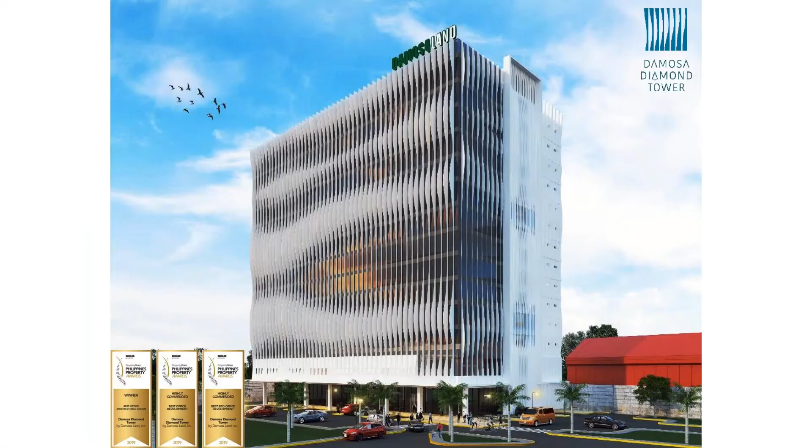Good morning, everybody, and thank you for joining us in a very significant week. We are very proud to present to you the Damosa Diamond Tower, which is a project that won Best Architecture Design for an office tower, as well as several commendations for office development and upcoming developments, not just here in Davao City, but also all over the Philippines with this significant contribution. Our company is PDP Architects, based here in Manila, and the project is in Davao City. As we move forward, we will see the next slide.

We would like to discuss with you the various highlights of it. It's located in a central business district already that is a mix of industrial, commercial, residential, bustling with views, interesting with its own tourism growth, a new seat of government perhaps for this administration, as well as convention centers, medical and emergency facilities. It is very close as well to the airport, hotels, and shopping districts. This is an artist's rendition of the project. Later on, we will be showing you actual photos of where we are in the stage of construction.

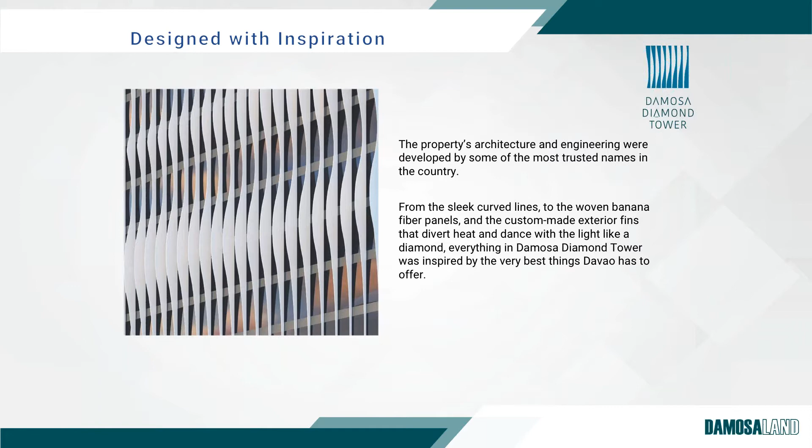So we have been commissioned to work on this project, and our inspiration takes form from the company's main agricultural business. Damosa is owned by a family that really began in the banana plantation business, and because of this, our inspiration was the banana fiber. That fiber, when you cut up the stalk in the middle, you will understand that the sinews of it and the grains are following a certain curvilinear form.

And we emphasize this in the building deck, as well as the facade, the fins, showing and highlighting those curves. So we feature a lot of sustainable technologies here, such as LED lighting, solar panels, and other eco-friendly insulation to make it a future-proof development. And we are committed to harnessing renewable energy as well, connecting both to the main grid with access to the alternative power source.

Next slide. So it's a PEZA accredited IT park in southern Mindanao, where it is. And in this area, we have been doing efficient planning for the building, including intelligent and smart features that will allow much comfort and convenience for the clients.

Some renderings, because we are already approaching completion stage, and you will see some of the photos later on.

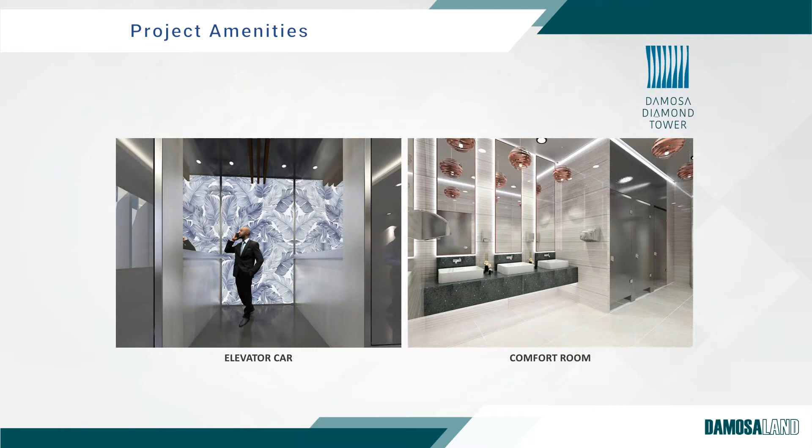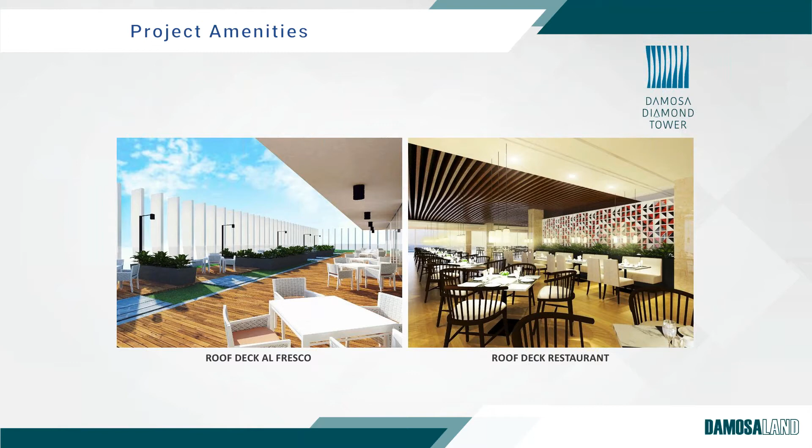Next. We also have a roof deck and a garden on top. And in light of this, we have that element of hospitality showcasing the cuisine of Davao, which will be highlighted right below a helipad. I would now like to proceed to the green building framework discussion of the Damosa Diamond Tower.

Of course, we followed the 9 elements for management, use of land and ecology, energy efficiency and conservation, water efficiency and conservation, waste management, green materials, transportation, indoor environment quality, and emissions.

So we have hired PDP Architects to be the green building professional to review for our certification. We currently also have a designated management representative, Mark Elipio. We are now working on consultations with our stakeholders.

It's a constant and ongoing process to discern various processes, solutions, discussions, strategies, coupled with the challenges that we are facing now with COVID-19. And through all of these, we have identified a project delivery team that will assist the management in the different stages of certification.

Moving forward, we have an effective site selection. We might say that the site in itself is part of a little township, and we were able to maximize the use of this particular plot of land leading towards the left side corner of the property.

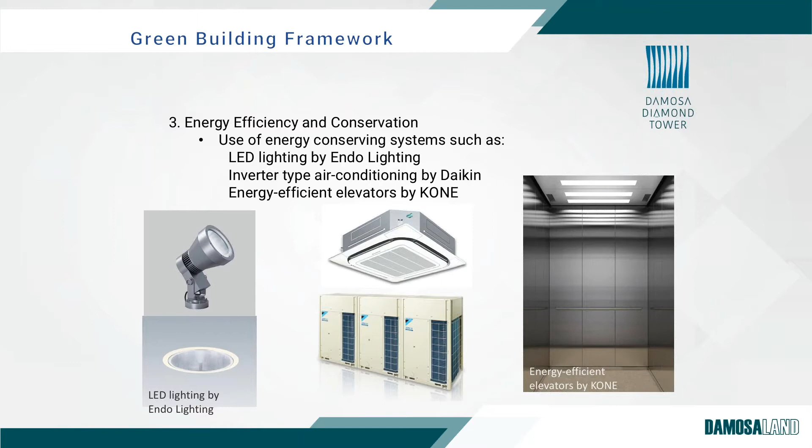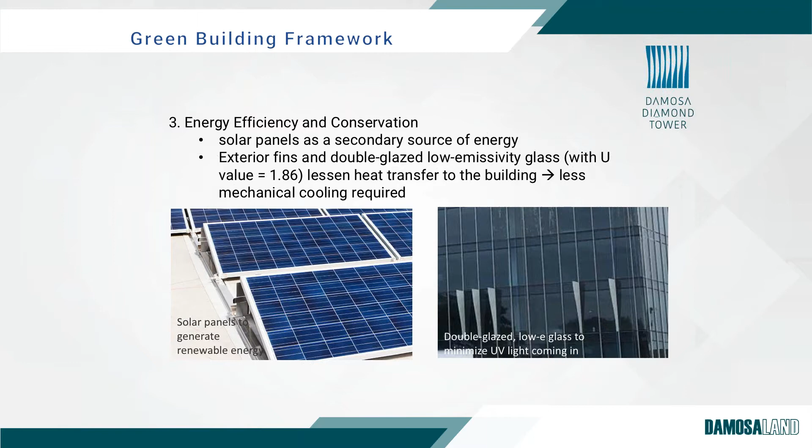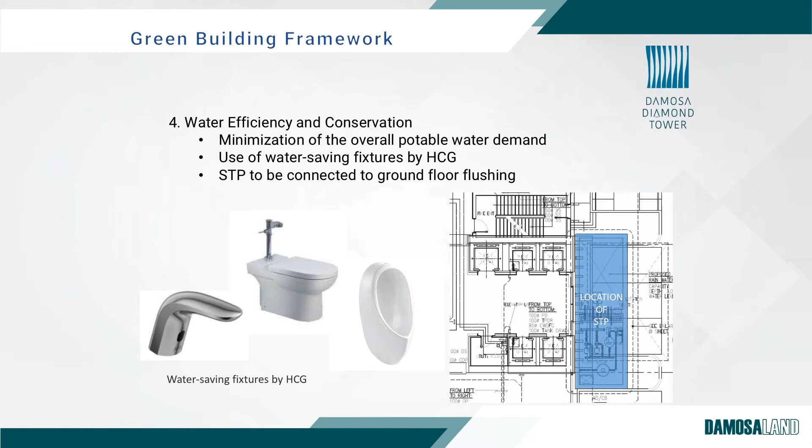We have our STP connected to the ground floor flushing systems. And then we also created ways by which we could save water even in the showers that we installed, all connected for the saving of this precious resource. Also for our basin, our rainwater cistern, which will then allow us to use this water for cleaning as well as for plants.

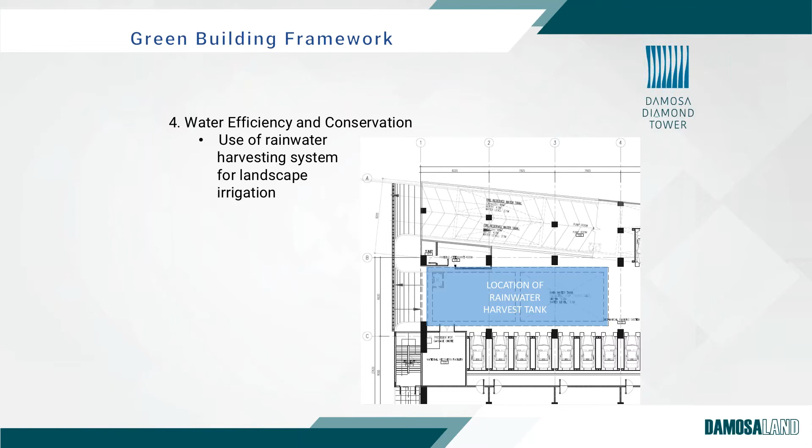This is the location of our rainwater harvest tank on the plan. For waste management, we have created a system by which we are encouraging all tenants, of course, to reduce, reuse, recycle.

We are all going to practice waste segregation, and the provision of the material recovery facility is a most vital part of our waste management strategies. We will be, together with the owner, implementing a solid waste management plan for waste reduction, not just in its operations for the building itself, but we are already implementing this during the construction process.

Green materials are a vital element in the green building framework. We were happy to meet and be introduced to various suppliers within that certain radius from the site. Our contractors are from Davao and can certainly work side by side with the efficiency of Manila-based contractors. We also got subcontractors from the Davao and Cebu area, and identified sources of materials, finding reusable wood and other sources for our cement and steel, all within Davao, Mindanao.

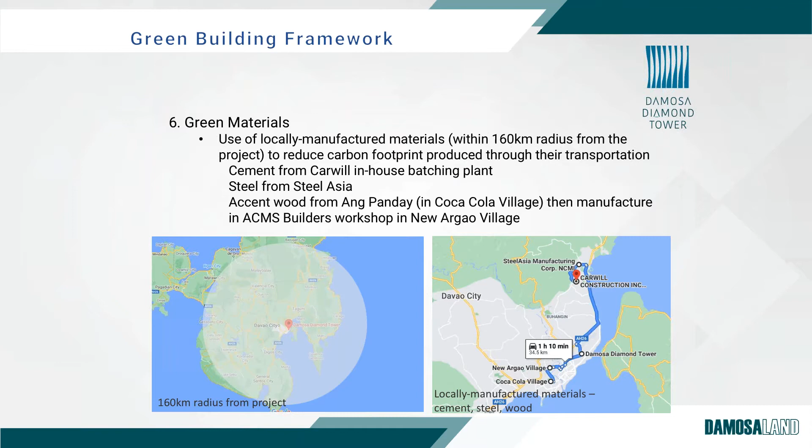It's a bustling economic zone, so there are a lot of locally manufactured materials now. We also discussed with Boysen Paints for their certified low VOC content paint, as well as another wood source from South Africa that is processed and assembled here in the Philippines, from a sustainable farm called Ang Panday. And as mentioned earlier, the fixtures and equipment are from green certified suppliers. Carwill Construction is the name of our contractor from Davao.

For transportation, our accessibility to different key establishments within the 250-meter radius from our building entrance is highlighted by the presence of restaurants, banks, commercial facilities, residential towers very close by, as well as a microtel owned by the same parent company. We have access to mass transport from jeepneys, tricycles, and are very close to the international airport.

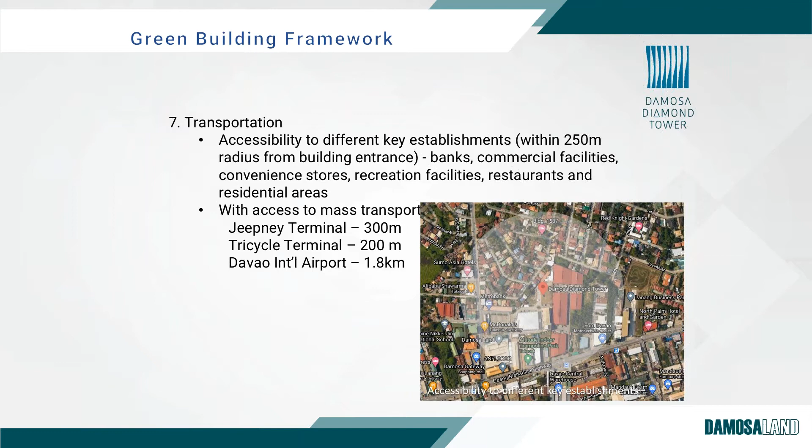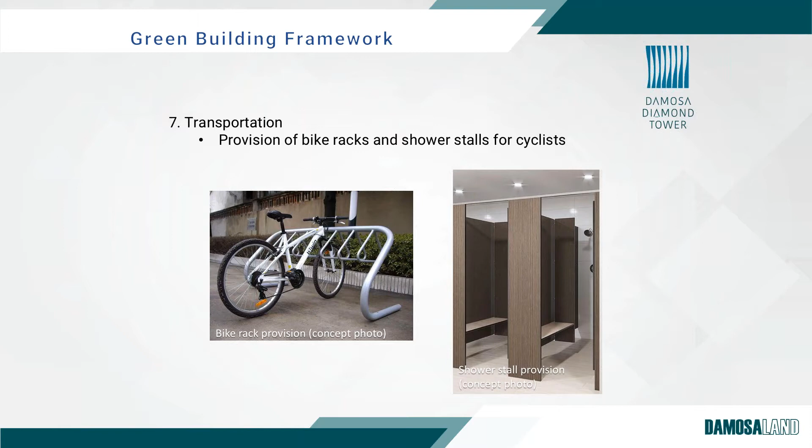We were able to design bike racks as well as create provisions for bicycle parking and shower stalls for cyclists and people who walk, to encourage that element of health, wellness, and sustainability. We have shower stalls on every floor.

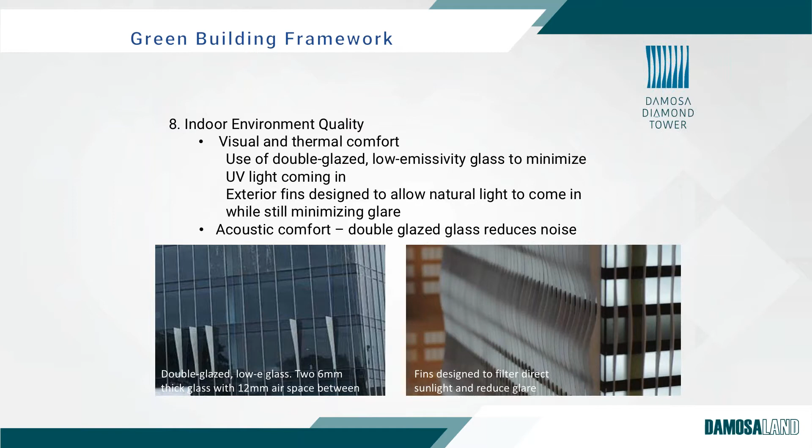For indoor environment quality, we took note of visual and thermal comfort. Aside from using double glazed low emissivity glass to minimize UV light, we used exterior fins designed along the grid of banana fibers within the banana stalk. This customized exterior fin is angled to the light. Just as Raymond Rufino discussed in his building earlier, we also designed graceful curves along the sources of light, creating not just an element of design but also the function of managing glare inside. For acoustic comfort, we found the best double glazing through our supplier, Sunland.

For indoor environment quality, we highlighted daylight access, approximately 95% for all users, and outdoor views access, which is 85%.

Once again for indoor environment quality, considering the contagion we are already experiencing now, we are future-proofing the building by installing mats that accept chemicals as well as sanitation alcohol for cleaning shoes, and sanitation gates, which will now be part of standard protocol for infection and microbial contamination prevention.

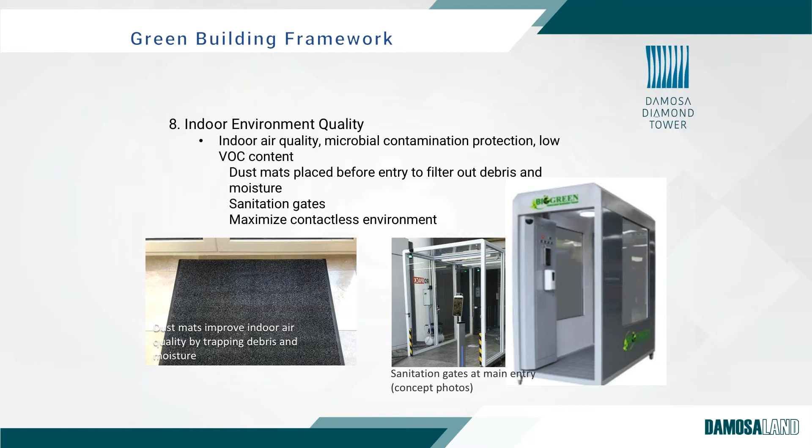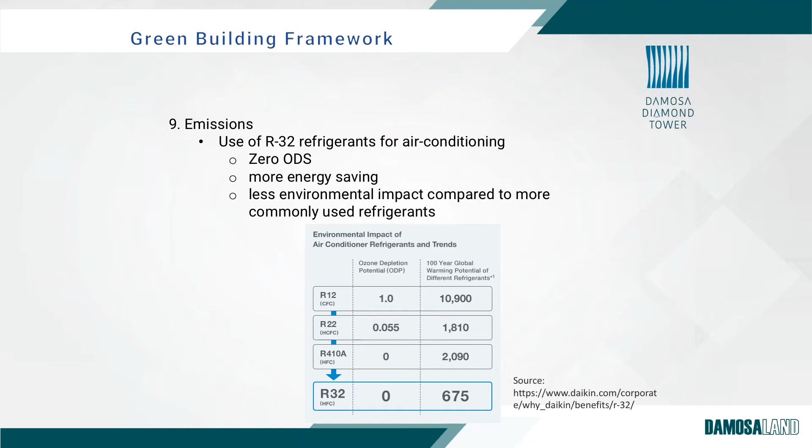We used R32 refrigerants for air conditioning, with zero ODS, and found suppliers for more energy saving equipment, especially for air conditioning, with less environmental impact compared to regular refrigerants.

We would also like to highlight a post-pandemic response that we designed together with the owner. This highlights the following principles: the use of antimicrobial surfaces, smart technology, creation of isolation pods of furniture especially in social areas, understanding visual cues, putting forth disinfection stations, and reducing touch points with more touchless, hands-free design from the doors to the elevators. All of this also blends with the BERDE standards.

The main entrances will have hand washing stations, shoe disinfecting mats, and the regular standard infrared fever screening now found in all public buildings. Everywhere you go in the Damosa Diamond Tower, you will find antibacterial surfaces as well as distance markers.

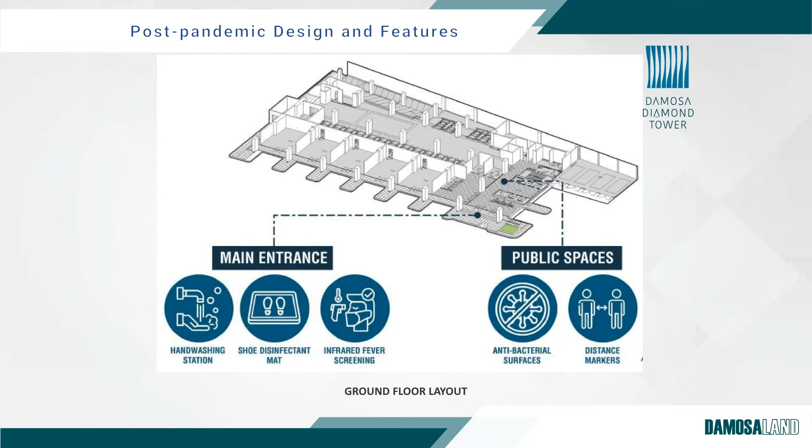There will be smart elevators as well, and antibacterial surfaces in the different surfaces and hallways.

For our roof deck and near the helipad, we would like to highlight our planters because we are encouraging urban farming, reflecting the parent company's agricultural history as well as its other development called Agrea, being a leader in sustainable agriculture in Mindanao.

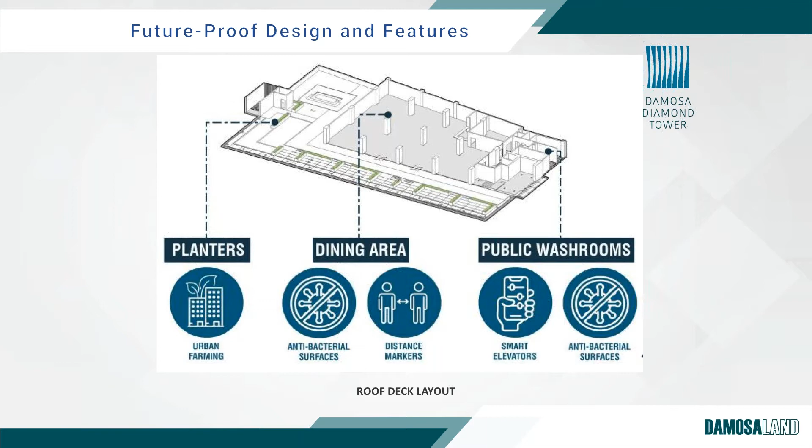For our dining areas, we have distance markers and antibacterial surfaces, and for the public washrooms, we also have antibacterial surfaces alongside our smart elevators. On the next slide, we would like to show you our construction updates.

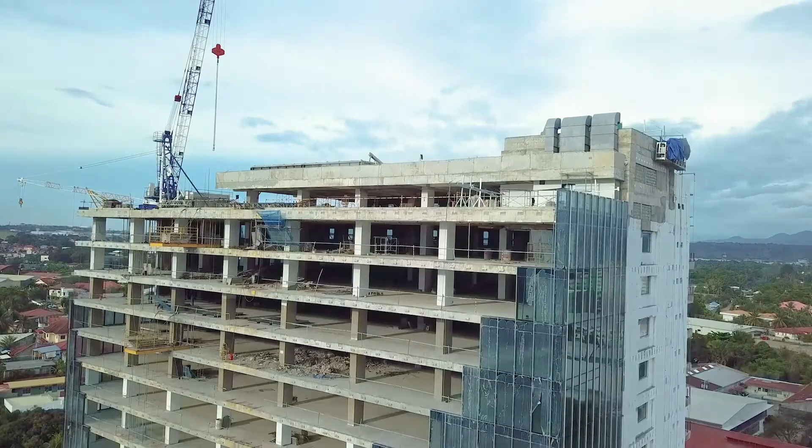We are expecting to finish and complete our project in November 2020 this year. We already have potential tenants, and we are very excited to welcome you as well to the Damosa Land's Diamond Tower.

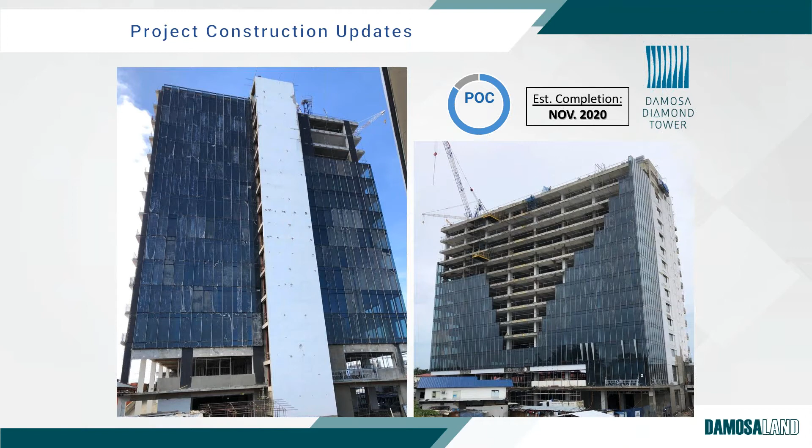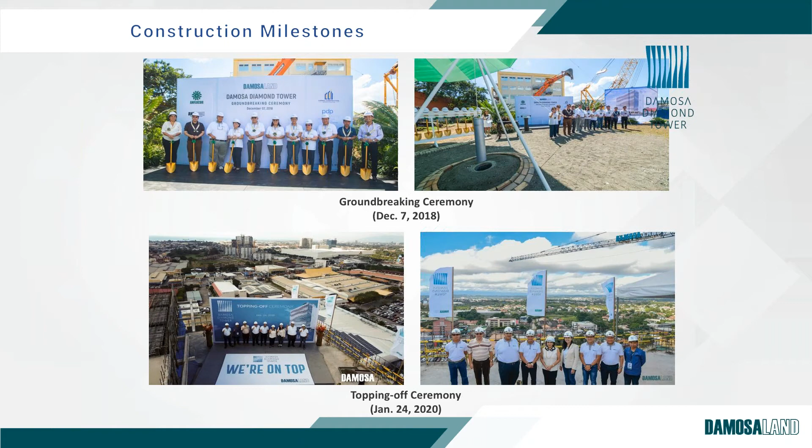Very quickly, some project milestones: our groundbreaking and topping off ceremonies, our awards for Best Office Architecture Design, as well as commendations for Best Office Development and Best BPO Office Development.

Truly, we're going to be a new landmark in Davao. And once again, as we approach this new normal, as we all call it globally, we are now spreading not just progress, but people all over the country. People now can work on various projects all over the world, even from Davao, Manila, Bohol, Cebu, Iloilo. And this is the way to progress. Let's spread it.

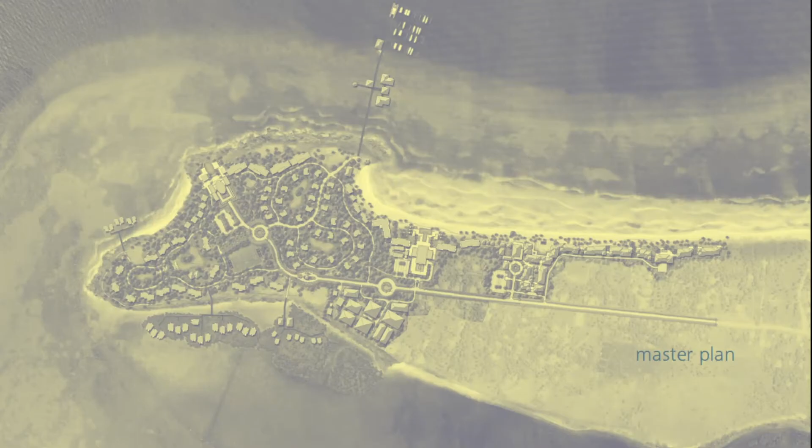WATG was then commissioned to create the master plan in 2013, encompassing the whole property, and this master plan was divided into 5 phases. The first, our topic today, is Modala Hotel and Moadto Strip. This is the render of the master plan provided by WATG to the owners.

Magnificent, right? Within this early stage, sustainability was already incorporated from the conceptual design. Core BERDE framework were actually considered prior to the owners' decision to proceed with the certification of Modala. Thus, Modala was planned and brought to fruition by a well-seasoned group of designers, contractors, and suppliers under the constant lead and guidance of the owners, Engineer Manuel Mendoza and Mrs. Elizabeth Mendoza.

So for this webinar, I will be showing some features of the project which are connected with the core BERDE framework of our certification. First of which, energy efficiency and conservation.

Lobbies, common areas, and guest room circulation areas all have natural ventilation, thus improving the indoor air quality and reducing the requirement for additional electricity for both lighting and HVAC system. Energy efficient materials were also used to bring together an energy efficient building to reduce the heat gain into all interior spaces and ensure low air infiltration in air-conditioned areas.

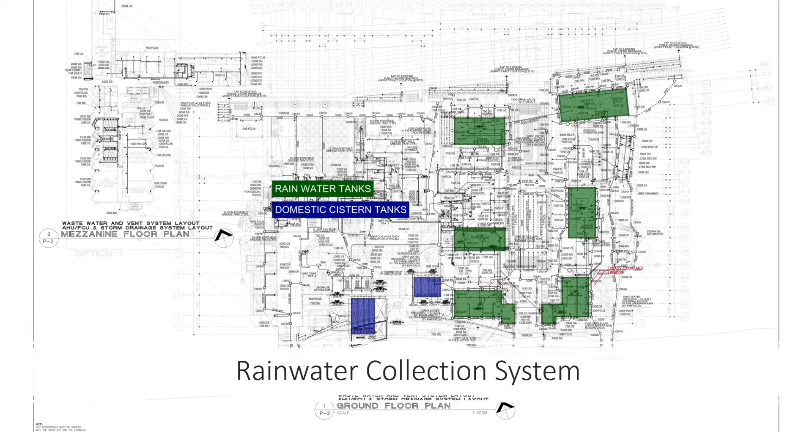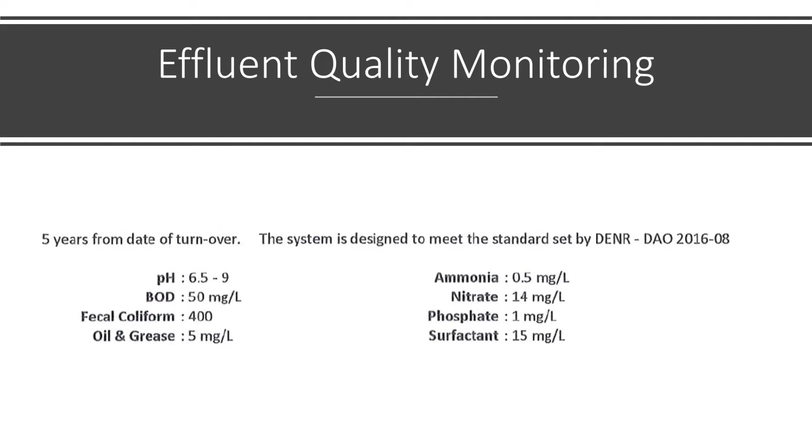For waste management, an updated sewage treatment plant system is installed in the project and compliant to the latest and more stringent requirements of DENR with these parameters.

Waste diversion and segregation: as the contractor, Monocrete has established alternative methods to systematically reduce and divert waste. These various business units provide strong support to the job site operations in ensuring that these are accomplished.

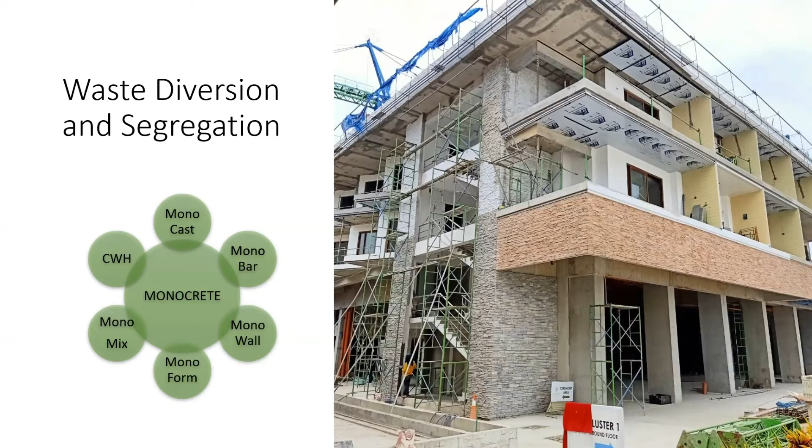As for both Mudala and Moadto, the design group have also incorporated 2 MRFs strategically placed within the site to properly manage and segregate all waste during hotel and mall operations. Daily beach cleanups are also done ever since construction has started. It is actually a crucial part of the morning and afternoon routine of housekeeping.

Engineer Manuel Mendoza is the chairman of Monocrete and owner of Mudala. He's actually at the forefront of this journey. He is hands-on and personally oversees the project. His heart is always with his people, continuously educating, training, and innovating. His mantra is sustainability through employee engagement.

His wife, Monocrete's managing director and owner of Mudala, Miss Elizabeth Mendoza, lives by her creed. Her life's journey is all about building trust for us to be better every day.

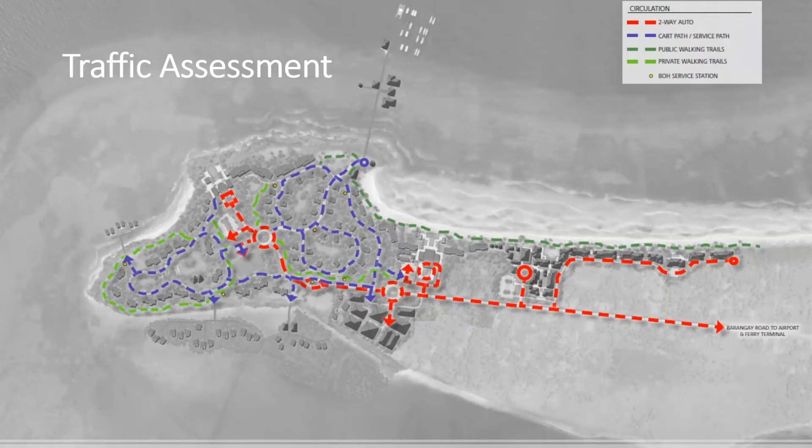For transportation, even the effect on traffic was given priority and established prior to the commencement of Phase 1. Here you can see pedestrian lanes, cart path or service path, and vehicle path. The mall, which is what we know as Moadto, is actually derived from the Visayan dialect, which means to go, will go to, or going to. Thus, pedestrian access is given the utmost priority when we are developing both Mudala and Moadto.

Partnerships with local transport associations such as PATDOA, the Panglao Tricycle Drivers and Operators Association, are made to make access to the site more viable. Partnerships with local markets are also established to bring the best of Bohol within the mall walls of this project.

Distinct drop-off areas for vehicles are developed, while pedestrian walkways are prioritized throughout for the benefit of guests and mall goers.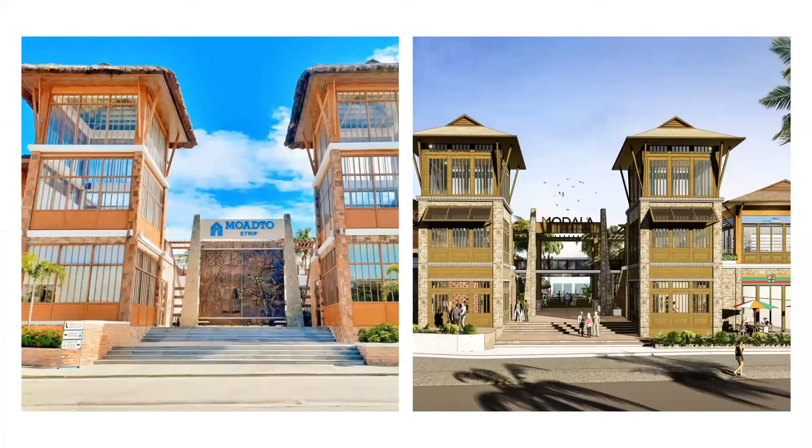Local residents are hired and trained to form the operations group to welcome you in your stay with Modala. To those in the area, we welcome you, as Modala and Moadto had our soft opening last week, the 18th of September, 2020.

So, to close, let us live a life with the hashtag closer to nature through our Modala Hotel and Moadto Strip.

Developments cannot be avoided. Developments such as this are necessary for society to thrive. But as developers and as professionals, let us always be respectful of the nature that surrounds us. Thus, we live harmoniously in the present and provide our kids with the future that they actually deserve. Thank you and good morning.

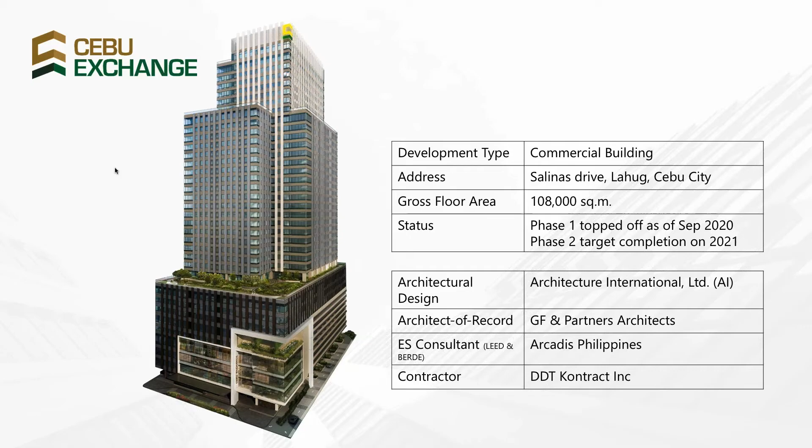Sustainability starts from the site selection because it primarily dictates how your building occupants will move through and from your building. We particularly selected this site for Cebu Exchange because it has 7 bus and jeepney lines accessible within 250-meter walking distance, very convenient for them to walk to and from. Also within 250-meter walking distance are many daily essentials around the place. This provides our building occupants a certain independence from single-user cars, as well as an alternative transportation mode.

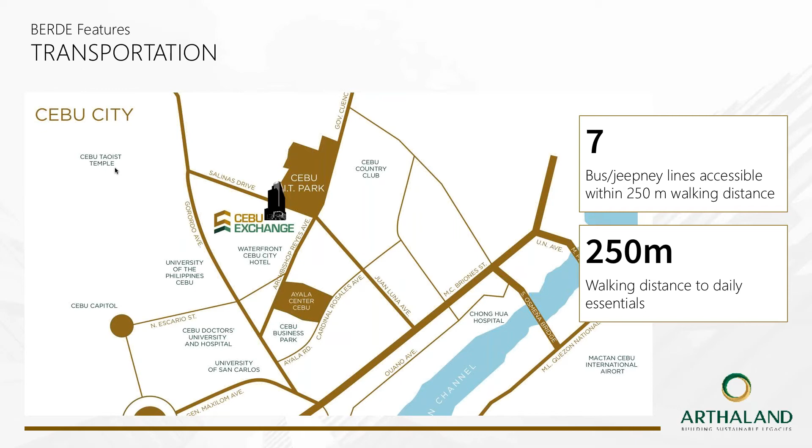As massive as our building is, we want our building occupants to be able to enjoy and access vegetation within the space itself. That's why we are providing 2,600 square meters of total vegetated garden decks distributed in the different levels of CEBEX. This is where they can relax and even do physical activities for their own health and well-being.

To reduce the water demand of our building, we have installed low-flow water-efficient plumbing fixtures operated by a sensor. This sensor is actually doing us very well now that it's pandemic because it is the best in terms of hand hygiene and preventing the transmission of diseases by avoiding touching any surfaces in the sink.

The gray water that comes from these plumbing fixtures, together with our rainwater collection tanks, we are able to recycle to use for our irrigation and toilet flushing demand throughout the building. That further reduces the demand of the building's water.

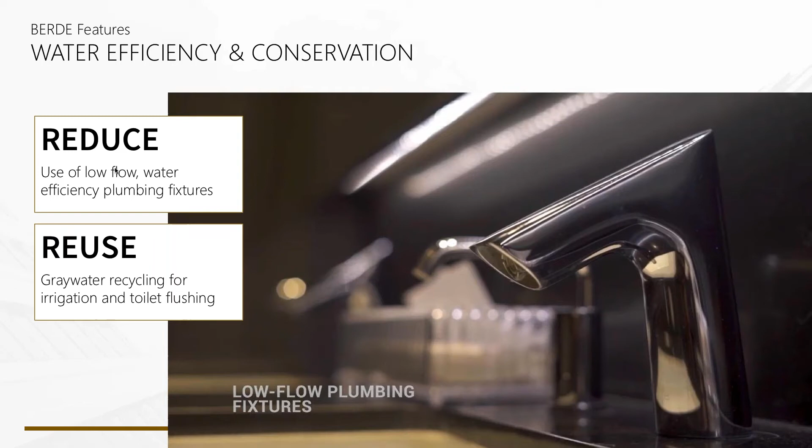For electives, this has been approved by Philippine Green Building Council. Arthaland empowers women in this male-dominated industry. More than 50% of our own workforce and our project design is composed of women, showing our belief in equal opportunity and gender equality.

The latest venture of Arthaland is gearing up our lobbies to be able to accommodate virtual concierge to receive our occupants and guests. This is a preventive measure from us to ensure unnecessary contact between our occupants and guests is avoided, as well as a preventive measure for transmission of diseases.

Potager gardens - we are designing all of our properties to have a potager garden. For Cebex, we have 200 square meters of growing area of edible garden available for our building occupants to promote healthy eating. And mind you, potager gardens are not limited to building operations.

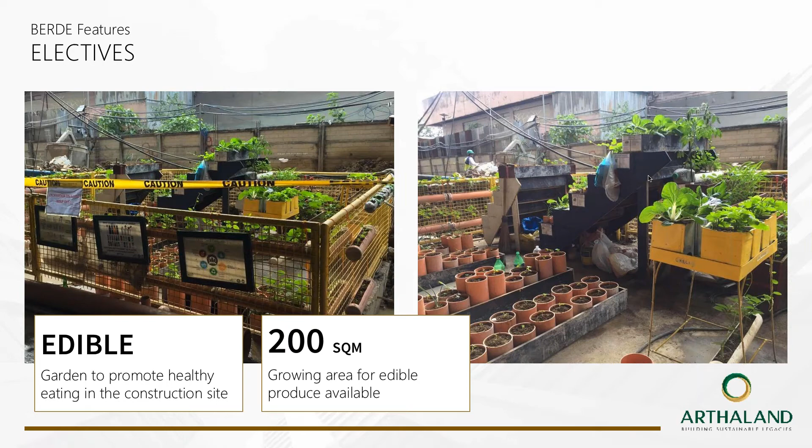Another fun thing that we do in Cebex is whenever we celebrate our construction milestones, we always link it to our sustainability commitments. That's why during our topping off phase 1, we celebrated it with our Earth Day ceremony, where we invited the Mandaue High School dance troupe to do a cultural dance. We also brought out the creative side of our construction team by displaying their artworks throughout our events.

Arthaland advocates not only for green building, but also for sustainable living. This is one of the many workshops that we've done to educate the public. This one is particularly for the kids of Cebu, where we invited 30 kids and a few more adults in this photo. We taught them how to recycle and compost.

An important consideration, most especially in big buildings like Cebex, is the indoor environment quality. Cebu Exchange is designed according to the international standard of ASHRAE 62.1 for ventilation, which ensures building occupants receive fresh air at all times, regardless of where they are in the building. Also within our ventilation system is the heat exchanger, which could also contribute to energy efficiency of the building.

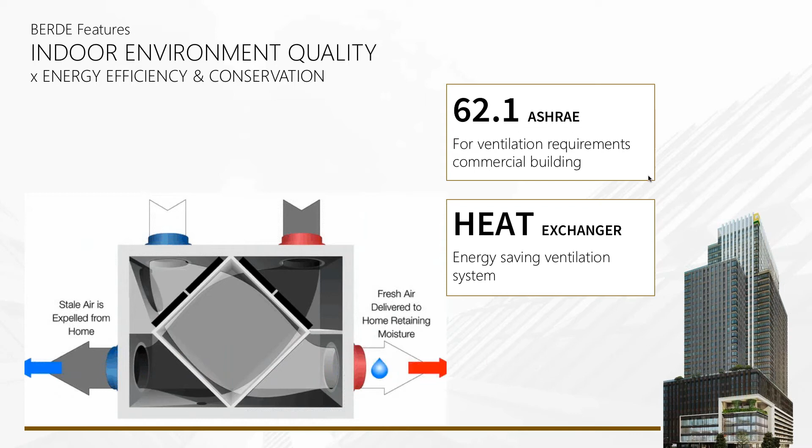More on energy - we already know, according to many studies and case studies, that more than 40% of a commercial building's energy consumption is attributed to HVAC and lighting systems. This is why it's very logical for us to target these two energy end uses for our building's energy conservation. HVAC is greatly influenced by the design of our building envelope.

So Cebex is designed with double glazing with a performance of 0.22 solar heat gain coefficient, which is significantly better performing than the regular single glass here in the Philippines. And of course, to optimize the whole building facade in terms of energy performance, we have designed it to have a window-to-wall ratio of 40%.

And strategies to directly influence the energy consumption of HVAC and lighting - we have designed the building to have an average efficiency of 15 for the AC system, and we have installed and specified low-emitting diode lighting for our fixtures.

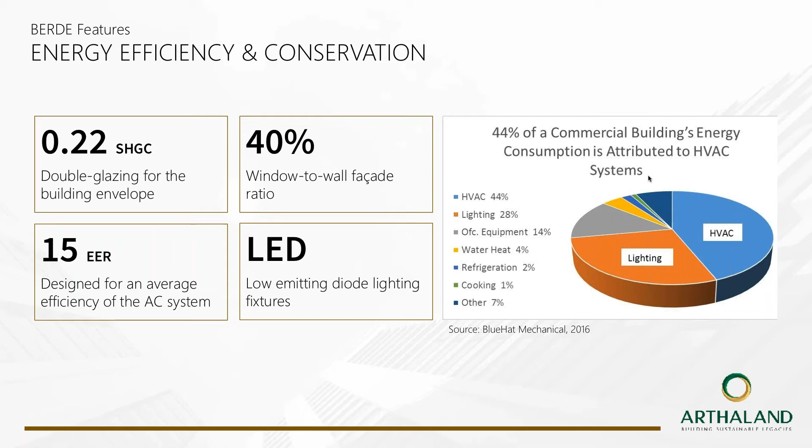With the total design of CEBEX, we are projecting 40% total building energy savings annually. And for the 60% that we do need to operate the building, we were able to fully decarbonize it by being supplied by a geothermal power plant in Leyte.

With that, CEBEX as a BERDE project that achieves high energy efficiency and is fully decarbonized demonstrates that net zero carbon building is achievable. We hope that more will join us, PHILGBC, and the World Green Building Council in this global goal for climate action. Thank you.

Harmony, the beautiful interweaving of different elements into a singular experience, an experience that's diverse yet cohesive, complete and perfectly balanced. From Arthaland, the Philippines' best boutique real estate developer, comes an innovative and sustainable office development in Cebu. Welcome to the Cebu Exchange.

Among Asia's top growth performers in 2017, the Philippines has continued to become a hotspot for some of the most exciting investment opportunities in the region. A highlight in this booming economy is Cebu City, an instrumental nexus for trade, progress, and development in the country. Known for being a world-class tourist destination, Cebu, the Queen City of the South, is also one of the most important and influential economic centers in the Philippines, thanks to its idyllic work-leisure environment.

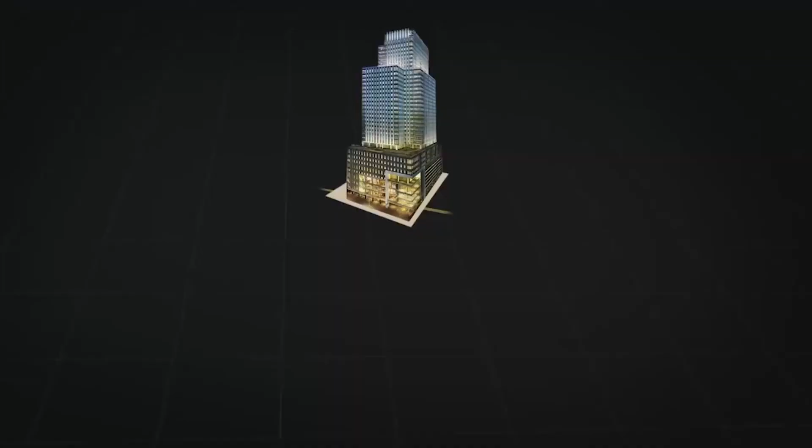And right at the heart of it all is the Cebu Exchange. Developed through a strong partnership between Arthaland and Arch Capital, the Cebu Exchange proudly stands at the gateway of the Cebu IT Park, putting businesses and organizations at the very core of not only the city's, but the entire region's progressive landscape.

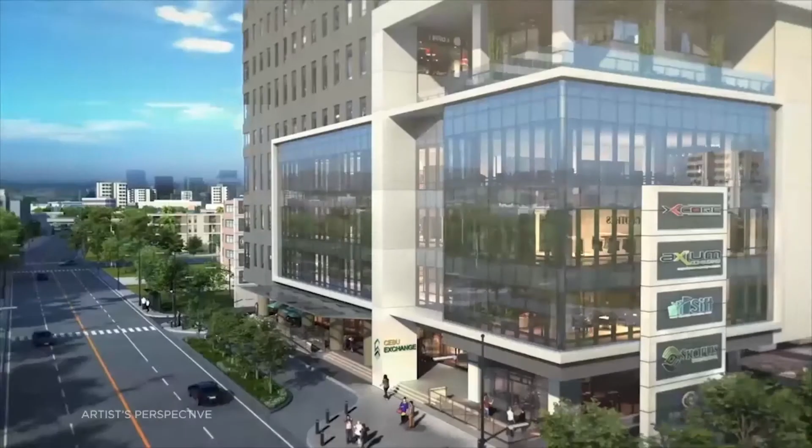Designed with leading-edge office technologies, an abundance of sustainable features, along with a completely diverse amenity and retail mix, the Cebu Exchange offers the perfect environment for both organizations and individuals to grow. A premier business ecosystem that promotes employee well-being and utmost efficiency, from operations to foot traffic.

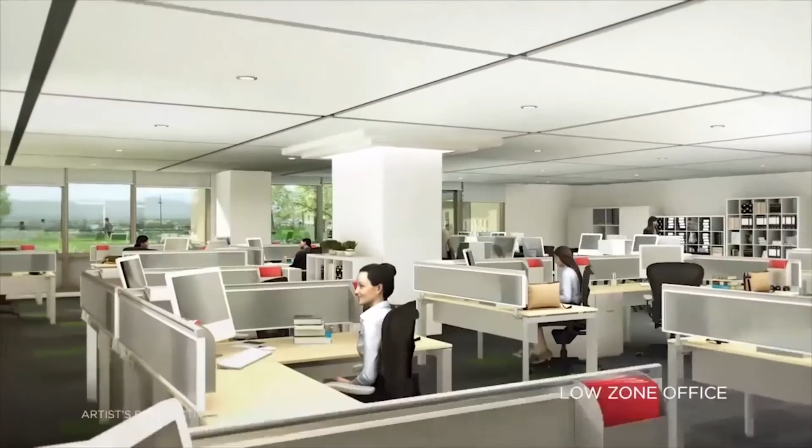A masterpiece of sustainable development, the Cebu Exchange will stand as the biggest and best green office development in the nation that will allow businesses to maximize operational efficiency, lower day-to-day costs, and provide a healthier, more comfortable, and more productive work environment, making this one of the most desirable business addresses in Cebu.

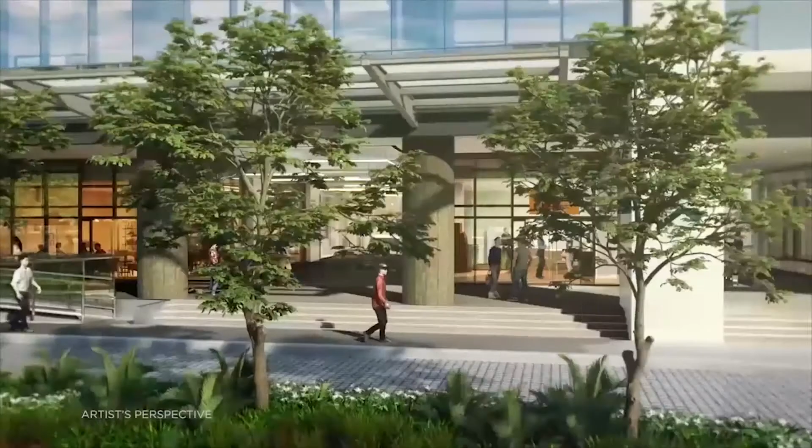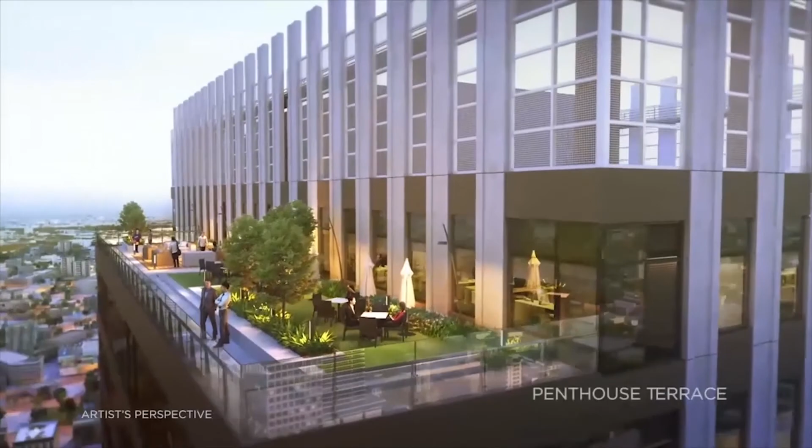Thoughtful and deliberate from design to execution, the development will boast of a wonderful selection of amenities, all in tune with the needs of today's workforce. And with 3 distinct smart zones, offering a variety of cuts and unit sizes, locators and tenants are sure to find the right space for their specific needs, allowing them to customize and curate their own harmonious working environment.

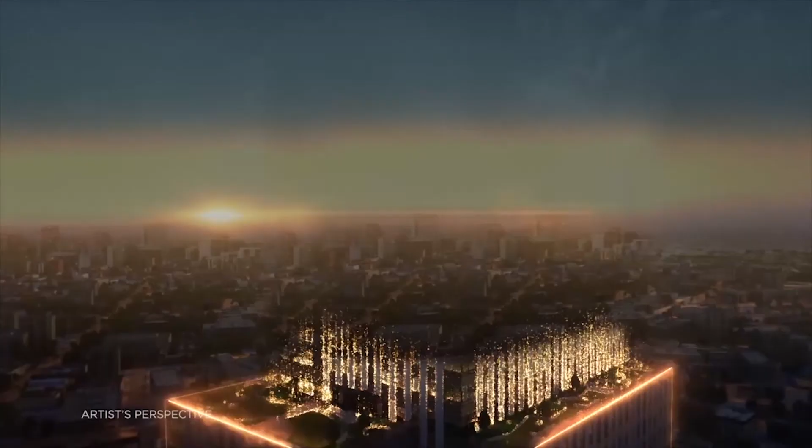This is the future of business, a holistic and highly connected work environment where harmony is not just a way of life, but a way of doing business. The Cebu Exchange, business in harmony.

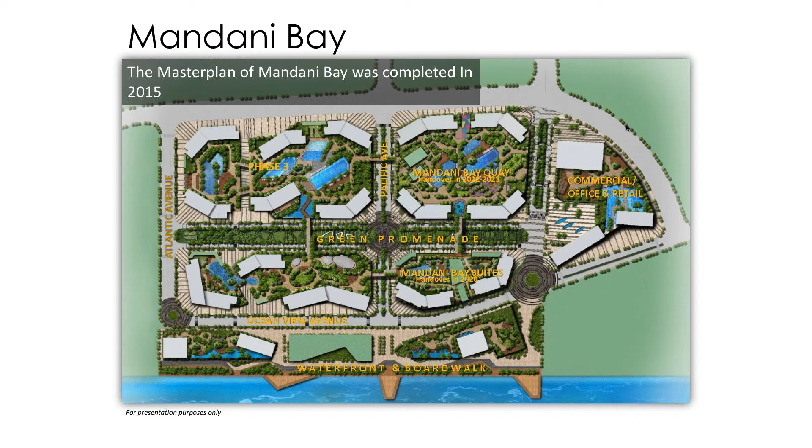In 2015, we completed the master plan of Mandani Bay, paving the way for the next 15 years of development. In 2016, we completed our design and drawings for Mandani Bay Suites, which is our phase 1 development in Mandani Bay. We completed this in the early part of 2016.

Come sometime in the middle of 2016, we received a little shock from the city LGU, telling us that now BERDE is a requirement, 3-star minimum. We were a bit panicky, have to say that, among the team members, because we were not sure how much this was going to affect our design and our drawings, and whether it would affect the launch of our project.

But the city was very supportive, very encouraging, telling us to give it a try and then we'd see how we could take it forward. So after about 2 weeks of denial and resistance, the team finally sat down and said, let's do a self-assessment and see where we are. To our surprise, we had achieved enough points for at least a 3-star.

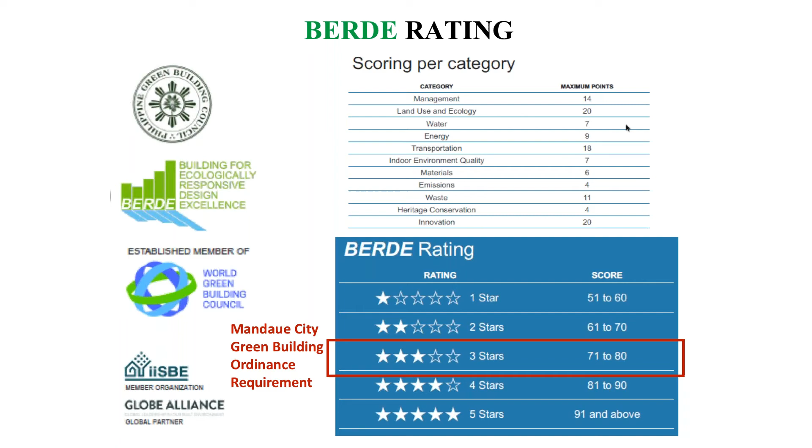That showed that sustainability design is actually the DNA in our company. Unconsciously, we had already incorporated many of these green building features into our design without even thinking whether this was for compliance or not. After that, everything is history. In 2017, we registered our project as BERDE registered. In 2018, we were certified 4-star for Mandani Bay Suite.

Just the process of the BERDE certification: we have completed the registration and stage 1 certification, which is pretty much on the documentation part. Now we are ongoing for the stage 2 certification.

Just to share a little of some of the green features that we have in our projects — most of these have been shared with the previous speaker, so it's nothing new, but it just takes a conscious effort to do it. For energy efficiency, we use LED lights in all our common areas, car parks, gyms, plant rooms, and so on for energy saving purposes, and to eliminate the need for people who forgot to switch off the light. So we put motion sensors in all the plant rooms, refuse rooms, even fire exits, and car park areas. If people forget to turn off the lights, it's okay — when there's no movement, the light will switch off by itself.

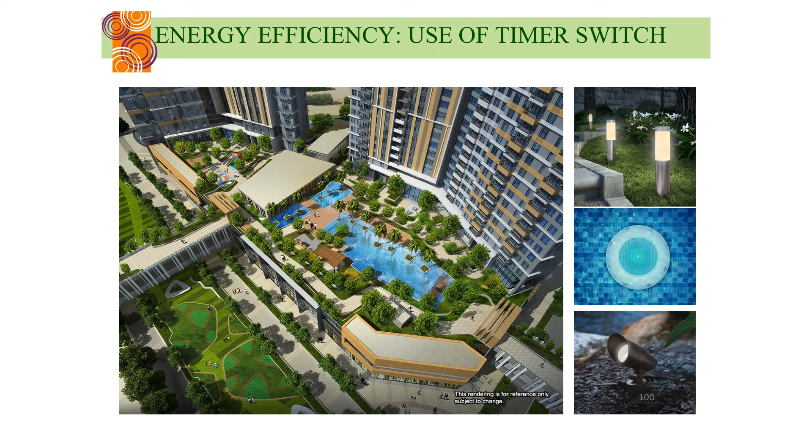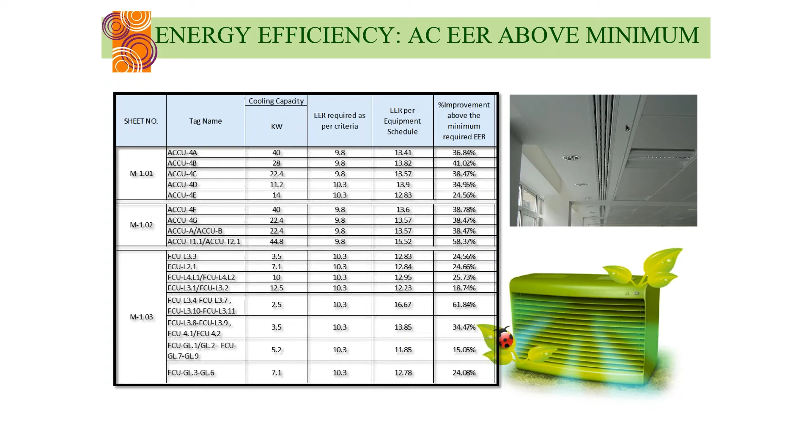Aircon, we install those with EER above the minimum requirement, again for energy saving purposes.

We also install electrical car charging station provisions. At this time, electrical cars are not that popular yet in Cebu, but we already look forward to that and make provision for it. So when the market is ready for electrical cars, all we need to do is install a charging station and we are good to go.

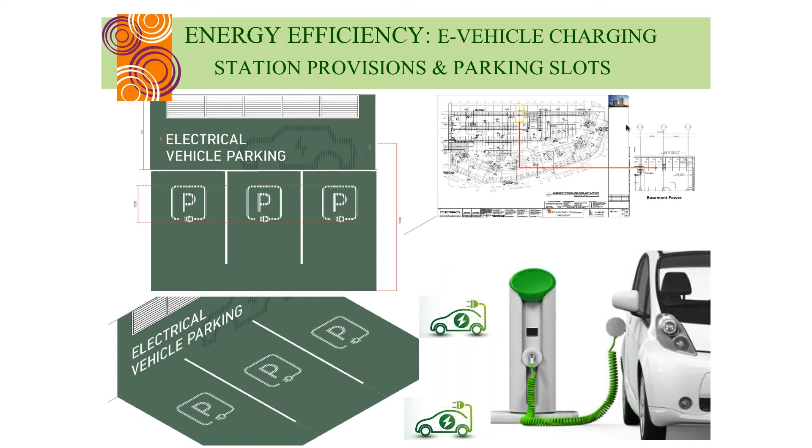Come to water saving, all these are low flow water saving toilet features. This is installed in all our residential units and also in the common areas.

Rainwater collection tanks are installed at our development and also in the building. So rainwater will be collected during the rainy days and used for irrigation purposes during the dry days.

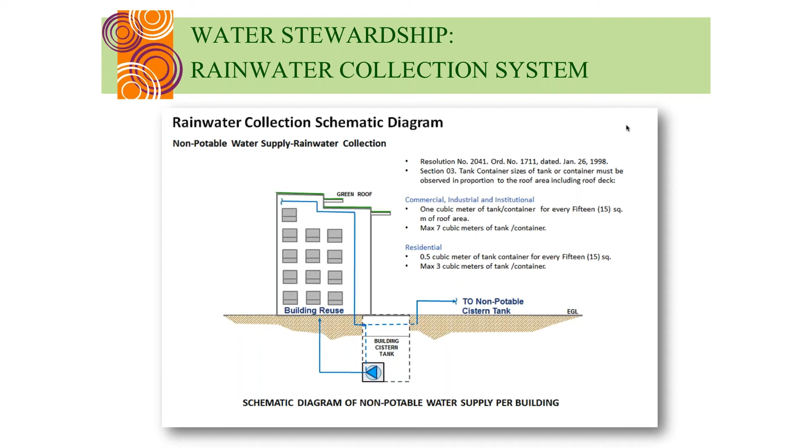Green materials, this again is you need to make effort to choose green materials. They are not the lowest price material in the market, but for the good of the environment, we always go with that. Painting, low VOC type of paint, and for the wood product, we go for FSC certified products.

In terms of construction, we encourage our contractor to put up a batching plant on site. In addition to handling the supply concern, we also need to cut down the traffic, the need to transport the concrete from a few kilometers away to our job site, and that also cuts down the carbon emission. All our batching plants comply with the ECC requirement.

In terms of formwork, we encourage our contractor to use metal formwork, especially for columns and retaining walls, and auto climbing system for the shear wall whenever possible. For areas where that is not possible, phenolic board is used, but we try to reuse it at least 7 times before we replace them.

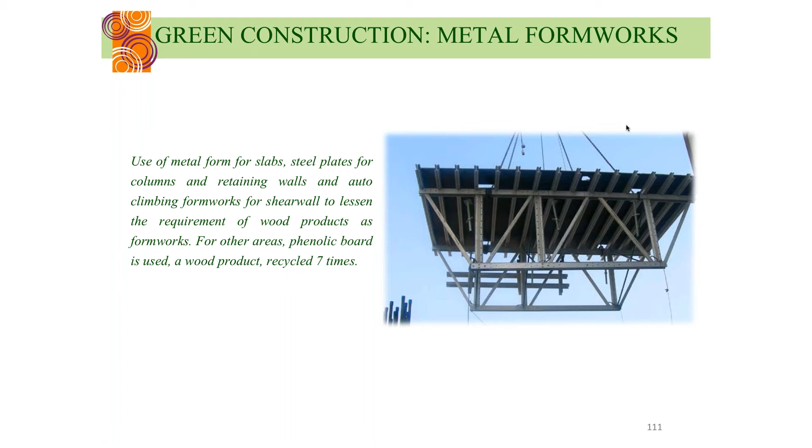Precast technology is also encouraged for use by our contractors. Precast external wall and internal wall is quite common. In fact, we are pushing our contractor to go a little bit more, thinking about using precast slab, precast beam, precast staircase. That will substantially cut down the wastage and also the use of wood formwork.

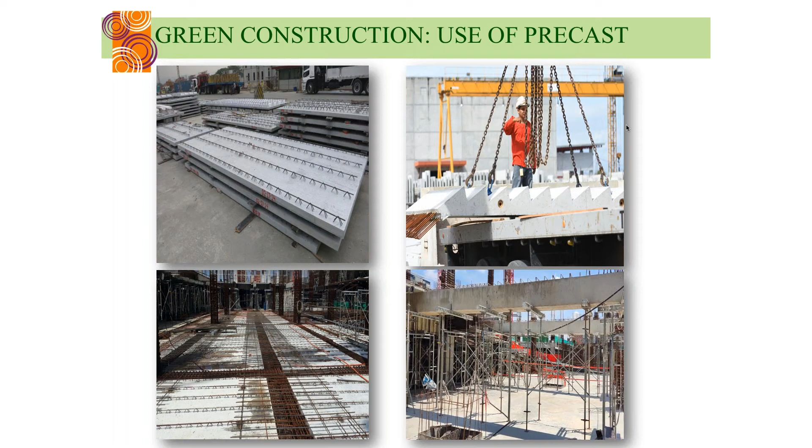Of course, for the building envelope, we are using this IGU glass that will cut down the heat gain for the building.

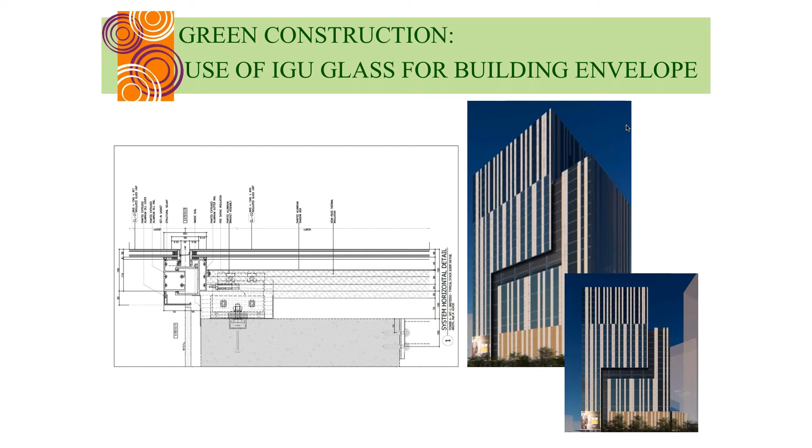In terms of our show gallery, most projects have one show gallery for every development. For our project, since we have 20 towers, from day one we built a very nice show gallery, and this show gallery will be used for the entire development, all 20 towers. So all we need to do is just replace the show unit, and we are good to go. This is a way to show that our sustainability practice is right at the doorstep of our Mandani Bay.

Open space design is also incorporated into our projects. Out of the 20 hectares of Mandani Bay development, approximately 75% are open space. Of that, 25% or more is softscape, and 50% is shaded hardscape. And right in the center of the development is a 400-meter green promenade that allows open space for both the resident and the tenant.

We also incorporated a 500-meter boardwalk along Mactan Channel, and when it's completed, this is going to be a very happening place in Cebu, and the place where you can watch sunrise in the morning. In the evening time, you can bring the family for a jog or bicycle ride.

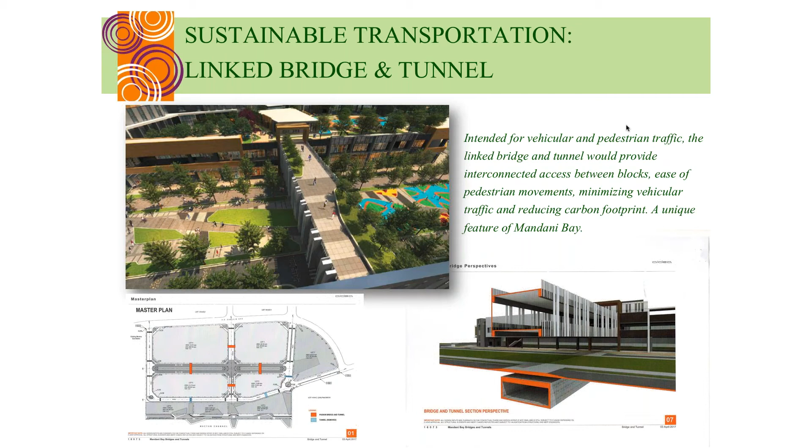We promote the use of bicycle racks provided in all the developments, and of course, we mentioned earlier on the e-vehicle charging stations.

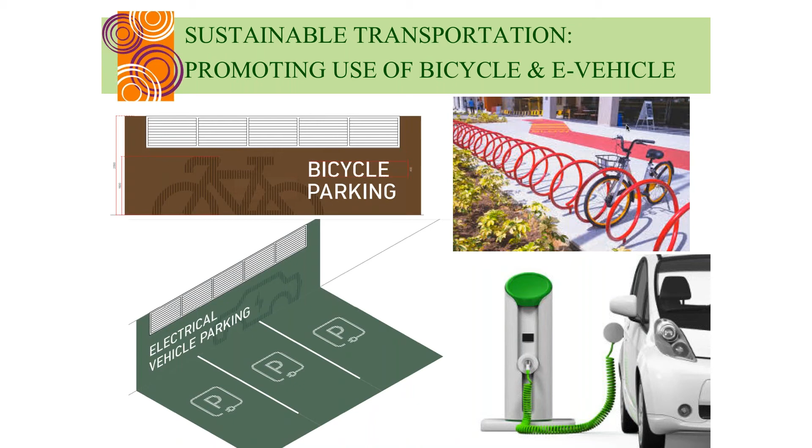Not to forget our Mother Earth, we make a very conscious effort to preserve the existing plantation on site. In fact, we design our landscape around the existing trees so we can preserve them. And for areas where we use new plants, we try to use native species.

Our commitment to the project is to plant at least 40,000 trees over the duration of our development, about 10 to 15 years. So far we have planted slightly less than 10,000. We still have another 30,000 to go for the next 10 years. This will be planted around the island of Cebu.

Our employees and also workers are encouraged to participate in some of the CSR activities, and we have taken part in coastal and river cleanup activities in Cebu in the past years.

And Tipolo Creek, this is a joint effort between Mandani Bay and the city of Mandaue for the rehabilitation of Tipolo Creek using EM1 technology, effective microorganism. We started this about 4 years ago. We are doing this every other week during the wet season. During the dry season, we may go treat the water every week using solution and also mud balls.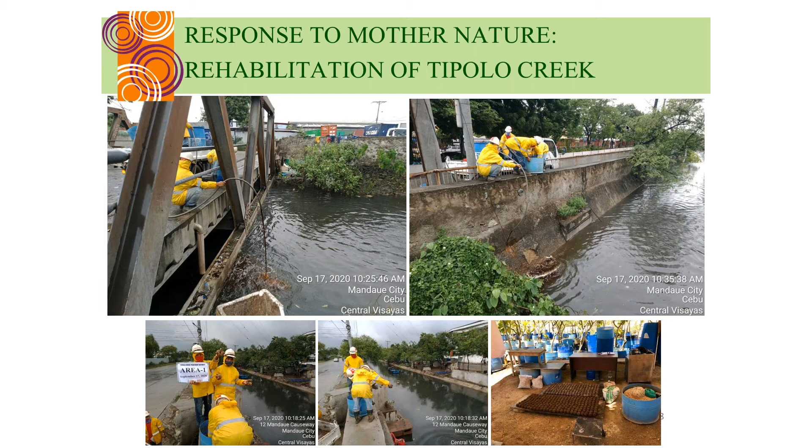Basically, it's like yogurt - you put the good bacteria in to eat away the bad bacteria. And you can see the effect over the 5 years. In 2015, that was the quality of the water at Tipolo Creek, and today, this picture is taken in March 2020. Of course, we did not solve the problem until the upstream contamination can stop, but the water quality has shown very significant improvement over the years.

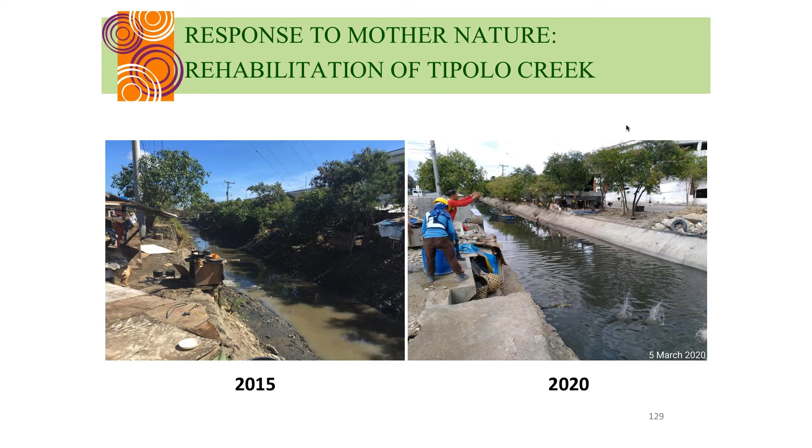For our office operation and also in the future our tenants and residents, we encourage the 3R: reuse, recycle, and reduce.

We have incorporated some innovation into our operations also. The team are using Oracle Aconex for document control. With this system, it's not a cheap system, quite an expensive system, but it makes the work a lot more productive and also cuts down the paperwork very significantly.

We are also using Novade for our site inspection, safety, and quality control. I think it's the first development in the Philippines to use Novade. Again, this cuts down a lot of the paperwork requirement - everything is stored online using apps, your tablet, or computer.

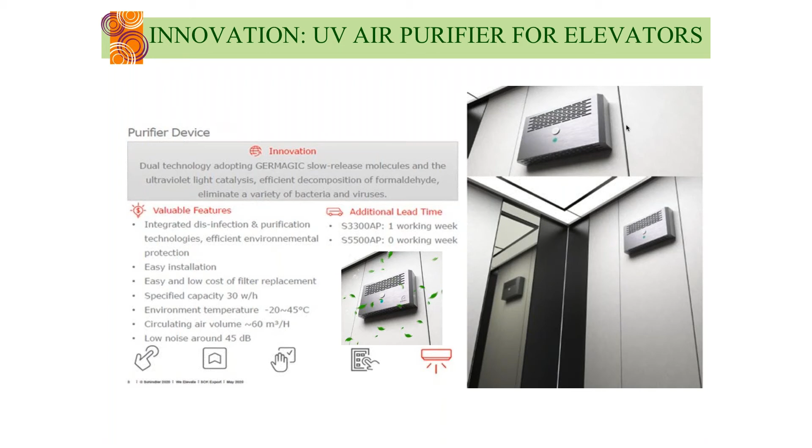In our response to COVID, we have installed UV air purifiers for all our elevators. This will clean the air when you're inside the enclosed space in the elevator, also taking care of the concern about airborne virus. Last but not least, on our escalators we also install a UV device on all the handrails to reduce the risk of contamination.

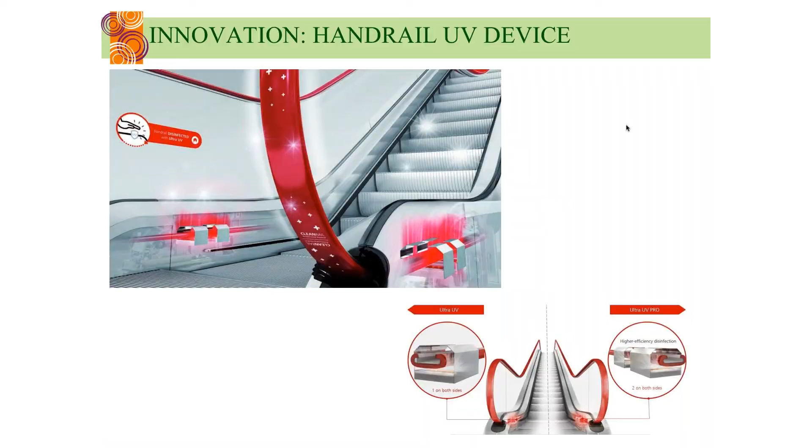So for us, the next phase after Mandani Bay Suites is Mandani Bay Quay. This is a project with 4 towers, 3 residential and 1 office. We already got it certified, and currently another certification is ongoing.

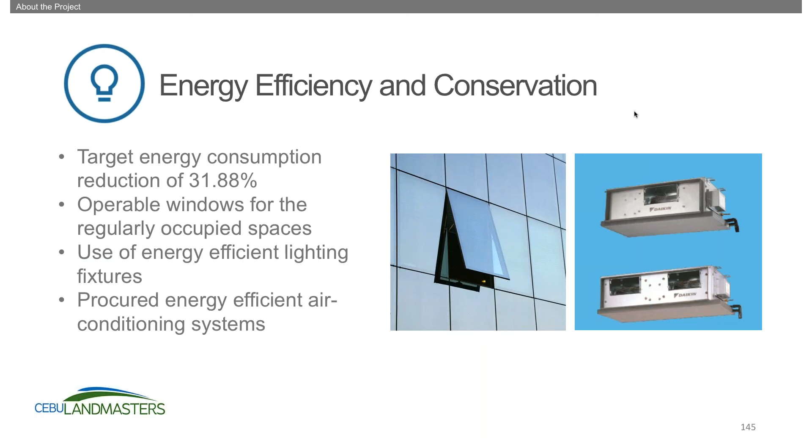For the water efficiency and conservation bracket, we're targeting a water consumption reduction of about 55.32%. Water collected from rainwater will go to a harvesting tank that will be used for our irrigation and for our office operations, mainly on the maintenance of the building. The project is connected to the centralized STP of Cebu Business Park.

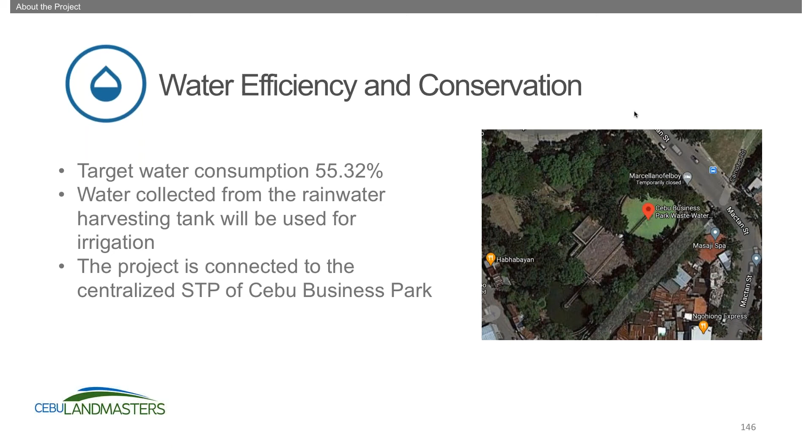Part of this engagement is for management to be able to understand what BERDE is really about. Part of the success of a project is to really deliver and transcend the learnings and principles of what BERDE is really about. With that, management continually educates the project team components or project members. We're currently on stage 2 submission for BERDE for this project.

To give you a background of the ecology and land use of where Latitude Corporate Center is: originally, the first land use was a golf course way back in the 60s, 70s, and 80s. This was a prime recreational component of Cebu City before, as it was occupied by Club Filipino.

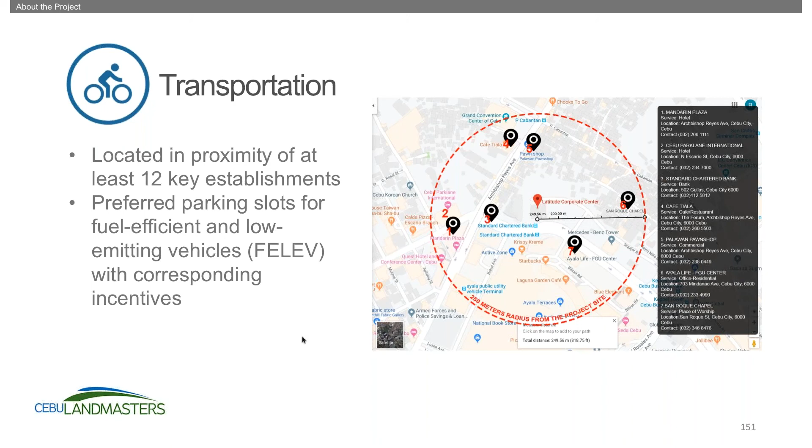The area is located in proximity of at least 12 key establishments. Preferred parking slots for fuel efficient and low emitting vehicles with corresponding incentives are considered in the project.

Our indoor environment quality: 100% of the regularly occupied spaces have access to daylight and outdoor views. 93% of the regularly occupied spaces have provision for natural ventilation. Designed with entryway mats in all public entrances. 73% of the total budgeted cost for materials have low VOC content.

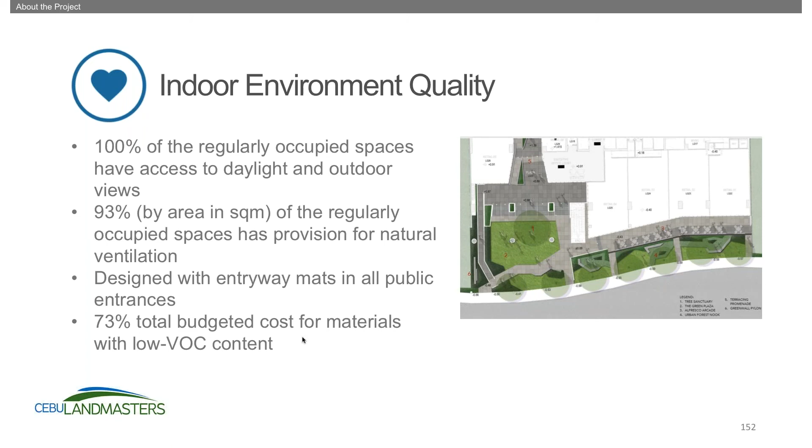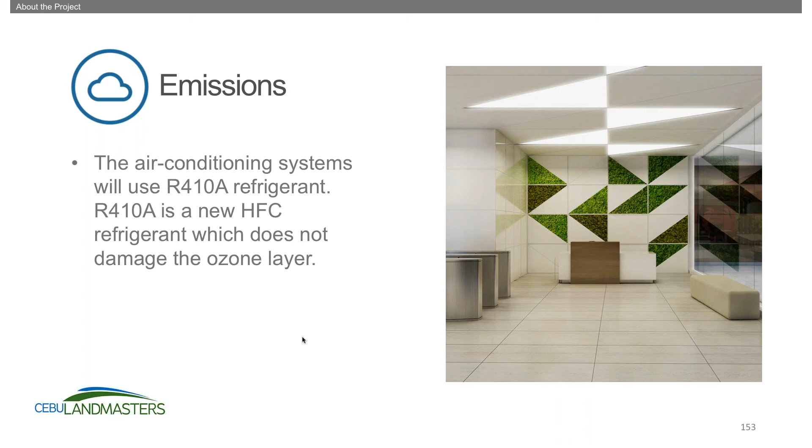Our air conditioning systems are using R410A refrigerant, which is an ozone layer friendly component. So that's what I can say about Latitude Corporate Center.